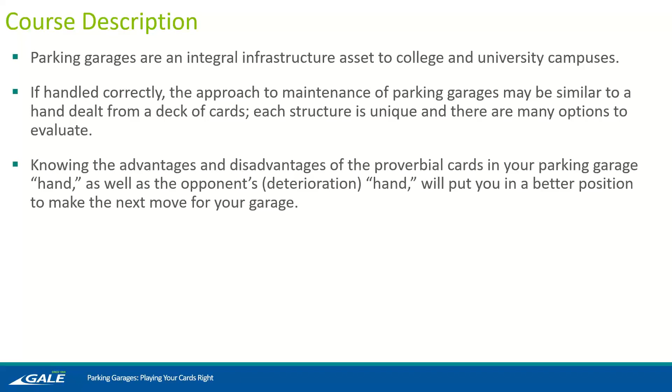So what cards do you hold in your hand? There are four major structural systems that I'd like to talk about today. There are additional different types of parking structural systems, but most garages fall into these four categories. The first one we'll talk about is a total precast concrete system. And when I say total precast concrete, I mean the superstructure, because you're looking at a cast-in-place foundation for pretty much all of your structures.

The second type would be a cast-in-place concrete system, which is all cast in place and nothing cast off site and brought to the site. The third type would be structural steel and precast concrete, which is a hybrid system. The fourth type of structural system is a structural steel frame with metal decking and concrete poured on top of the metal decking.

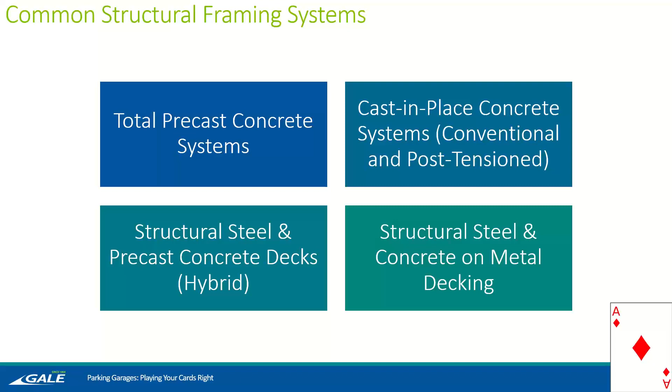Oh, sorry, this is lagging a little bit.

For the total precast concrete system, you have a cast-in-place concrete foundation that takes some time to excavate and pour. Then the superstructure is actually all fabricated off-site and shipped to the site in pieces. The photo on the left shows the crane in place, erecting one piece of precast.

When that piece is placed, there are some welds or bolting done in place, and then they move on to the next piece. The photo on the right shows the facade of a precast concrete garage, and you can see the jointing of how it all comes together like a set of Legos.

The thing about pre-stressed precast concrete is that most of the long span members are pre-stressed. In the photo on the left, the members that span from left to right are 60 feet long. They put the pre-stressing strands in these forms, which have fixed end pieces, and they pull them at each end and tension the strand before pouring all the concrete in the form.

They allow the concrete to come up to about 75% of total strength, which they can achieve in about one day in the plant. Then they release the strands, which puts a tensioning force at the ends, helping with the flexural strength of those members.

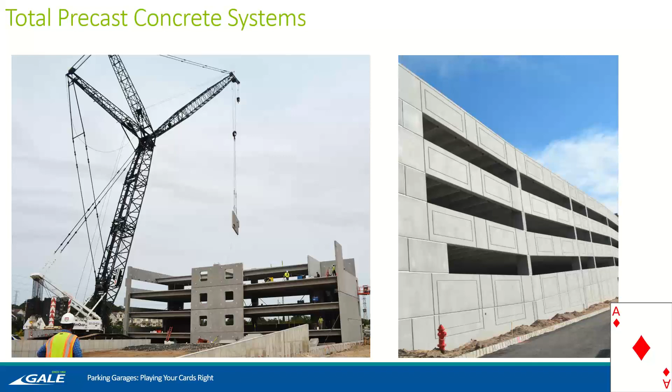So I'm going to talk about some pros and cons of this construction method. The pros: because they are prefabricated elements, they have a certain level of quality control they can maintain. Typically precast concrete plants have very high roof structures with overhead cranes, so they can pour these without rain or other weather effects during fabrication.

There's also an organization called the Precast/Prestressed Concrete Institute that certifies these plants and does inspections to make sure they're keeping proper records, that their concrete is coming up to strength as stated, and that they're doing all the quality control procedures they need to do.

As a result, you end up with a superstructure that is more durable than, say, a cast-in-place concrete structure in some respects. We inherently have cover on the embedded reinforcement in a concrete structure, which provides some protection for the structural part of the concrete.

As you could see from the photo I showed earlier, the construction schedule can be expedited for the superstructure because the crane will put up 20 pieces a day, sometimes even more, and it goes really quickly during construction.

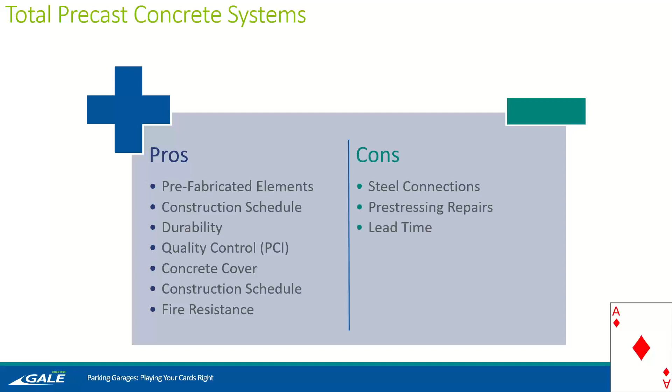The next structural system I wanted to talk about was the cast-in-place concrete system. Just like the foundations are formed and poured in place, a cast-in-place concrete system is formed and poured in place, and often requires some level of temporary shoring while the concrete comes up to strength before forms are removed. The quality control in the field can vary depending on how much construction oversight there is during construction of the garage.

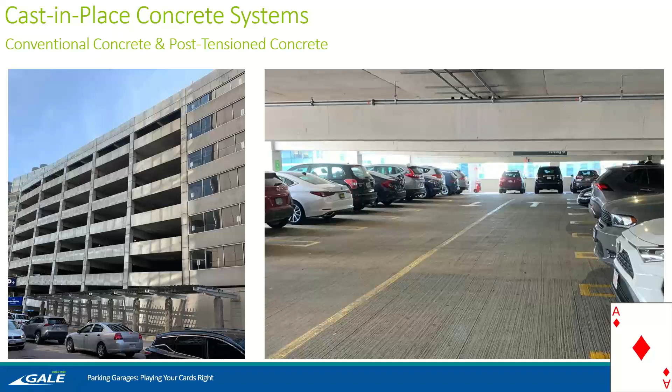I'll flip to this next slide where I have the pros and cons. An advantage to this system is that there are fewer joints. Unlike the precast concrete system I just discussed, the cast-in-place concrete system has continuous joints, and oftentimes the reinforcement runs continuously through, like a beam to column connection or a slab.

Everything is tied together continuously, which can result in less deterioration of the joints depending on the level of maintenance. Just something to be aware of: with a cast-in-place concrete system that's how it works, but with a precast concrete system you have a lot of joints that you might need to maintain or repair over time.

Cast-in-place concrete systems are often used if you need flexibility in the framing, such as an odd footprint for the structure, or if you need options for ramping or different types of bays and chamfered sides of the garage. Those are advantages to considering a cast-in-place concrete system.

The long span condition achieved with pre-stressing can also be achieved with a cast-in-place concrete system by using post-tensioning. It's a similar concept, but the tensioning happens after the garage is poured. The strands are draped inside the forms, the concrete is poured, and once it reaches adequate strength, the tensioning cables are pulled tight. That's why it's called post-tensioning for cast-in-place garages, and pre-stressing for precast garages, where the stressing happens before the concrete is poured.

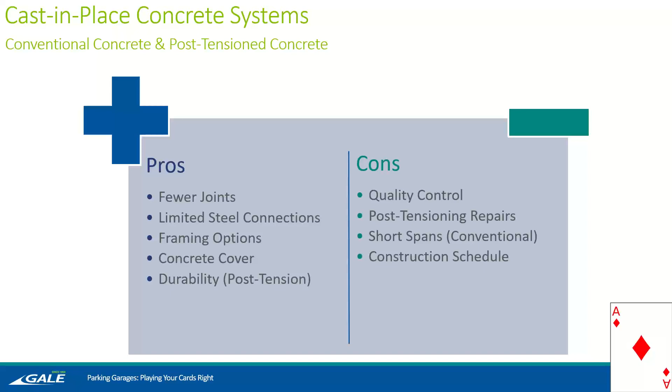The advantages are that the precast concrete deck has quality control from the plant, and you have concrete cover on the members. You can also see deterioration of the steel if you're doing regular evaluations, catching problems ahead of time, whereas with concrete it sometimes remains hidden during a visual evaluation.

Steel connections can be susceptible to deterioration over time, and again, pre-stressing repairs can be costly if it gets to that point. The durability of the steel frame can be a concern if maintenance isn't kept up with, and the lack of concrete cover on the steel can make it more susceptible to deterioration if the paint coating deteriorates over time. Sometimes steel frame garages also have a fireproofing requirement.

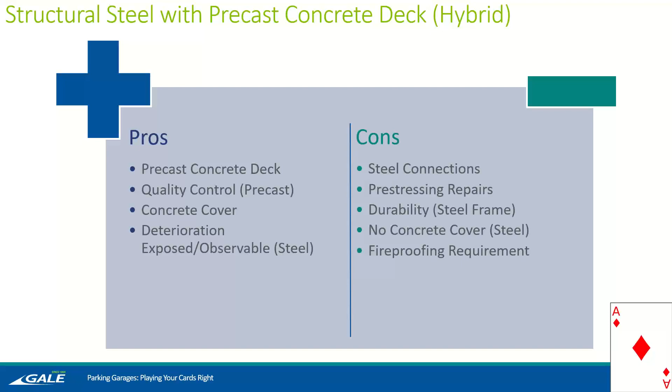The last structural system I wanted to talk about is structural steel with a metal deck and concrete slab. The way this system works is a structural steel frame is erected, the metal deck is supported right on top of the steel beams, and then a concrete slab is poured on top of the metal deck.

A lot of times these systems are a little more susceptible to deterioration, but can still be maintained and have long service lives. So you just need to be aware of the cards in your hand and what you need to do to extend the service life of your structure.

These structures tend to have lower initial cost and can be quick to erect and install. There's more flexibility with the framing options with this one, because with structural steel you can do virtually anything you want with it.

Deterioration is exposed and observable if you're looking for it. The disadvantages can be quality control, as we've talked about before. The durability of the metal deck is very susceptible to deterioration. We'll talk about next how moisture gets into the concrete and really doesn't have much of a place to go when it hits the metal deck, so it often sits on the metal deck and causes more deterioration that way. And there's really no concrete cover on the steel, so some of it may need to be fireproofed.

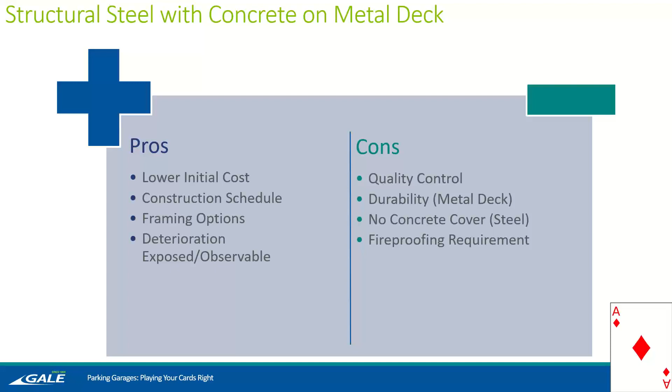So that was a long first section, but understanding really what you have on your hands is really important when you think about how to take care of this asset, what you need to do to repair it, and to really understand what's happening.

So the opponents are the deterioration culprits. There are four of these I'd like to briefly go over: harsh weather exposure, de-icer chemicals, failed drainage systems, and failed waterproofing systems.

Before I dive into that, I'll go over a brief description of the majority of concrete defects, which have to do with the ingress of water, and depending on your geographical location, the use of de-icing salts, chlorides penetrating the concrete, because concrete is a porous material. Even though it looks solid, it has air in it and pores that water can get into, eventually reaching the reinforcing steel.

When water reaches the reinforcing steel, there is a protective coating on the steel inherently, but eventually that erodes and the steel starts to rust. As the rust builds up, it exfoliates and causes an expansion of the reinforcing steel area. The concrete material itself is very strong in compression but very weak in tension.

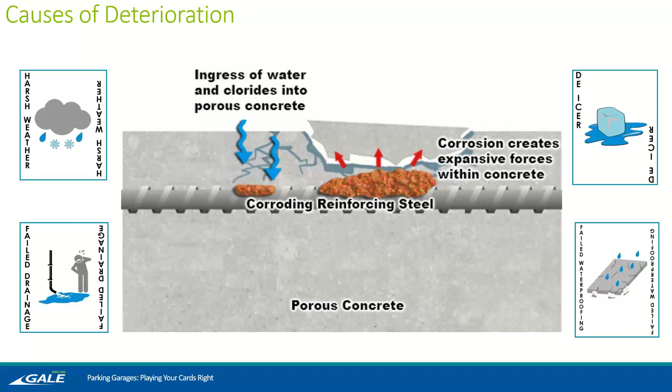With harsh weather exposure, we see a lot of this in climates with quite a bit of snow, and clients don't always have the ability to dump the snow off the side, or have a snow gate to push the snow off, or even a snow melter situation where you'd be able to melt the snow on site.

Sometimes, and this is in a city setting, these photos are of a parking garage where the owner needed to clear the snow so people could park, but didn't really have anywhere to put it. So they put the snow in the corner, and by the end of winter it's gone, and they kind of move on. But in this pile of snow is also de-icing salts and whatever they used to treat the decks ahead of time.

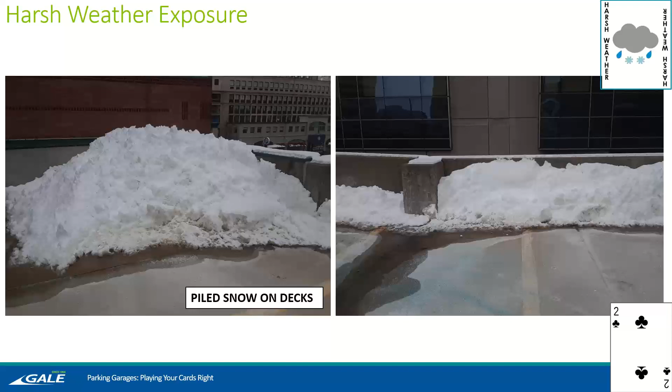Or even during the last snowstorm, they clear the snow and then salt it, or whatever they do, and then it all piles up and eventually melts. When that snow melts with the chemicals inside of it, the chemicals get into the concrete through cracks, through the pores, before it gets to the drainage. Some of it reaches the drainage system, and the part that doesn't sometimes gets into the decks.

That leads us into talking about de-icer chemicals. It's a catch-22, because as a university or a school, you need to keep your pedestrians safe and make sure cars aren't crashing into the sides of the parking garage. But at the same time, the garages are made of concrete, and salt isn't great for the concrete. So it's kind of caught in the middle of two things pulling you in two different ways, right?

So how do we deal with that? We'll talk about what de-icing chemicals do to the concrete, and we can talk about ways we can still use some chemicals to melt the snow, but maybe find ways to counteract that in another way.

We'll talk about that a little bit later. But these are just photos of the de-icing salts that you can see, and some water that's kind of suspended on the deck that hasn't quite made it to the drain yet.

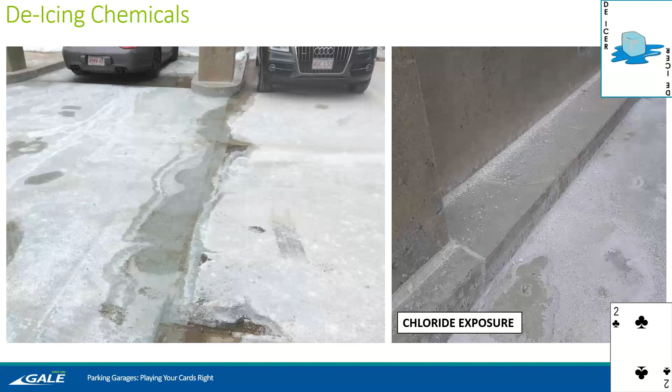We talked about how the chlorides, once they get to the steel, along with the moisture, actually accelerate the deterioration. If you just have water getting into your concrete, it can still cause deterioration of the steel and the exfoliation and spalling, but the chlorides tend to accelerate that chemical reaction.

So these are another slide looking at the underside of the concrete decks. On the left, you see a concrete on metal deck slab with structural steel framing supporting the slab. This is an extreme case where this has been ongoing for a long time, where the moisture and the de-icing salts have gotten so bad into the metal deck. The metal deck is starting to deteriorate and allowing that to get into the structural steel. This was once covered in fireproofing, and the fireproofing has even come off of the steel in this situation.

On the right, this is a precast concrete garage that didn't have maintenance on the joint sealants. The joint sealants I was talking about earlier protect the connections between the precast concrete members, but they also protect the structural load carrying members below. On the right, you can see the precast concrete has deteriorated. There's a pre-stressing strand along the bottom of this picture, and there are stirrups from the beam that are also rusted and need to be repaired. That's just because the joint sealants above had failed, and the water with the chlorides was getting through the joints and down into the concrete and then into the load carrying members.

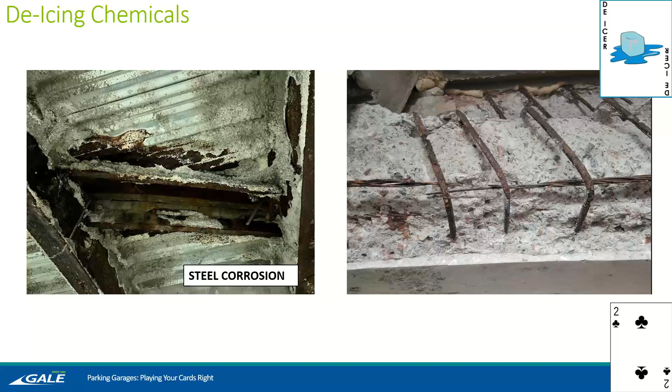All right, the next one is a failed drainage system. Failed drainage systems can fail in different ways. They can crack and cause leaks, or they can just be clogged and need to be cleared.

I included this photo on the left because this is a cast in place concrete pier with a precast concrete column above it. What happened in this situation was the drainage wasn't working above, so the water was backing up and finding its way through the joint sealants and down the side of the column, and then it reached this foundation where the quality control was a little bit different. There was a ledge to catch the water, and over time it really ended up deteriorating.

The photo in the middle shows after we demolished the concrete that was not sound anymore, and that's what was left. In this case, because this had gone on for so long, the whole garage needed to be shored up. On the left, you can see some post shores, but there were shores for the main load carrying girders. On the right photo, you can see one of the shores holding up the girder. That's another location in the same garage. All the way up to the roof, we had to shore this so that the repair to the foundation could happen without risk of anything happening while we're making that repair.

So the failed drainage systems can be a real problem, especially when they're clogged and then the water needs to find a new place to go.

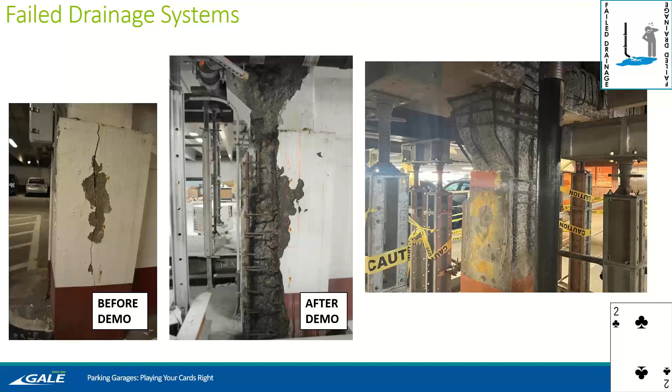These are just other photos from the top side. On the left, we have water that can't get to the drain. In the middle, we have a clogged drain, the water building up, and when it sits on these joints, it will find its way through and eat at whatever's there. On the right, we have another photo similar to the first one, but a different garage, where the water was coming right down the side of the column.

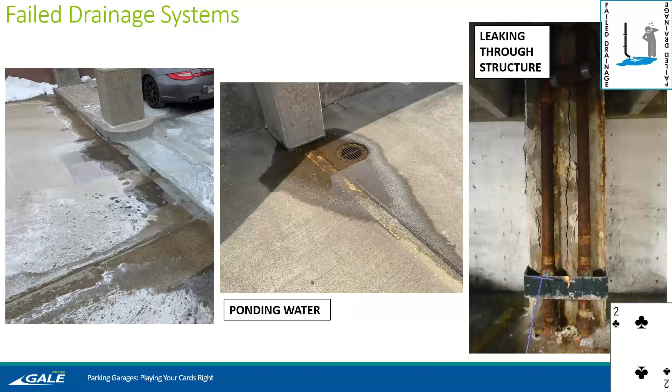And when it hit the cast in place concrete foundation, that's where it really did a number. When we sounded this out, hammering around the side of this is a way to identify unsound concrete. The entire concrete cover of 2 inches was completely gone and ready to come off. So for the repair of this structure, we also had to shore this up to the roof to make sure the whole foundation pier doesn't fail during the repair.

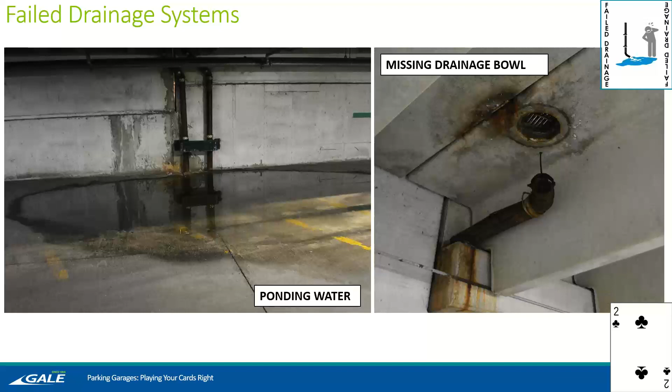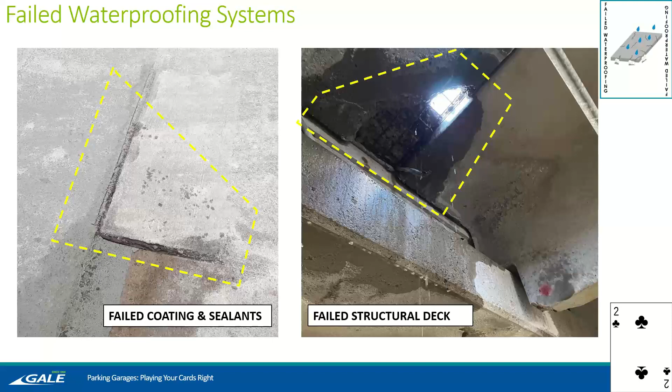It's just actively leaking. When the waterproofing system does fail, this is the kind of deterioration that you end up seeing. This is a close-up on the left of a joint sealant on a precast concrete system. This is a joint between 2 double T beams, very close up, showing you where the joint sealant has failed and allowing moisture to get into the joints.

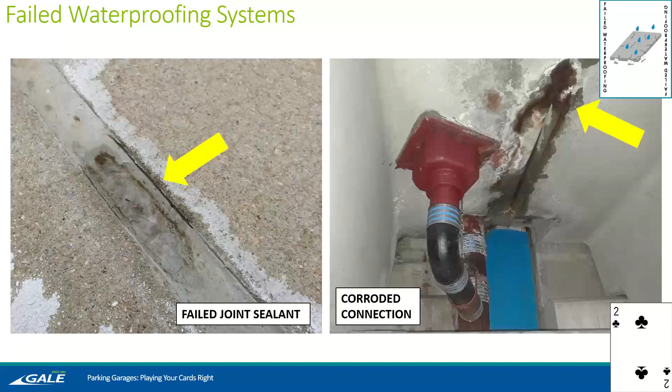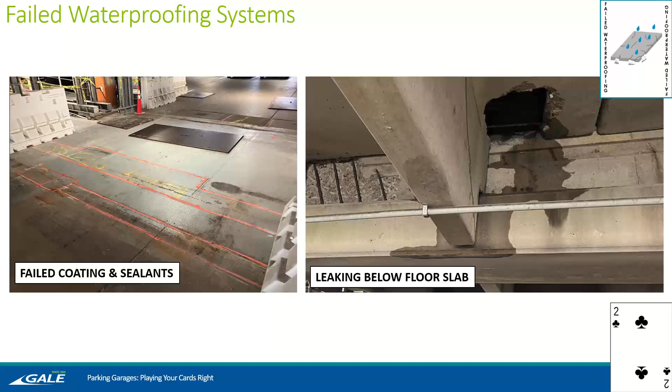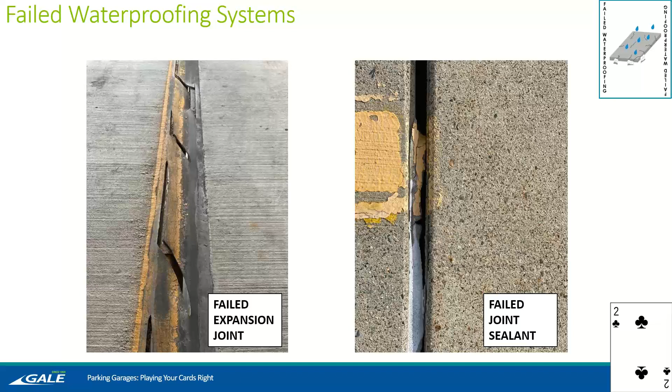On the left, we have a failed expansion joint that has completely surpassed its useful service life and needs to be replaced, which is allowing, again, moisture to get through. And same thing with the failed joint sealant on the right - that joint is completely gone and needs to be replaced.

So let's go into the third section to talk about the game. So now you know what cards you have, what cards your opponents might have, and now you need to figure out, well, how do I approach this game of repair? Because I know my garage needs repair. I can see this, I can see that. What's going on?

So the step-by-step process that we typically take is to address the immediate safety concerns. These are typically areas of concrete that have spalled, but haven't completely broken apart from the structure and might actually fall from overhead - those would be immediate safety concerns. And then the next thing is the structural deterioration that needs to be addressed. It's not a safety concern yet, but will be in the future.

Then we go to minor defects. The thing with the minor defects is you do want to repair them because they eventually end up migrating into the structural deterioration category. So if you can repair the minor defects ahead of time, then they are a little less costly than the structural deterioration ones. And then cosmetic repairs would be the last one.

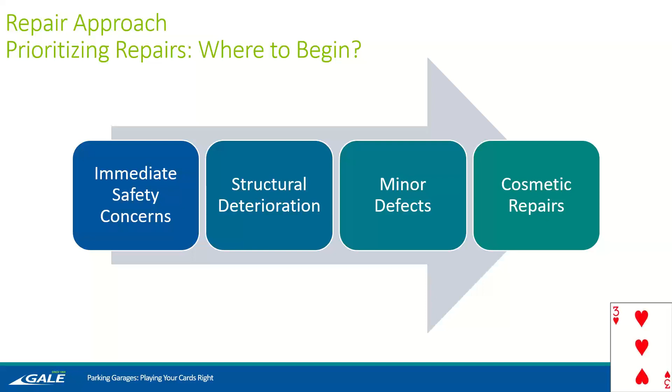Now, I know that most people would like to see the cosmetic repairs happen first because you want a garage that looks nice and feels good to be in. But from a repair standpoint, we want to try to take care of the other items first.

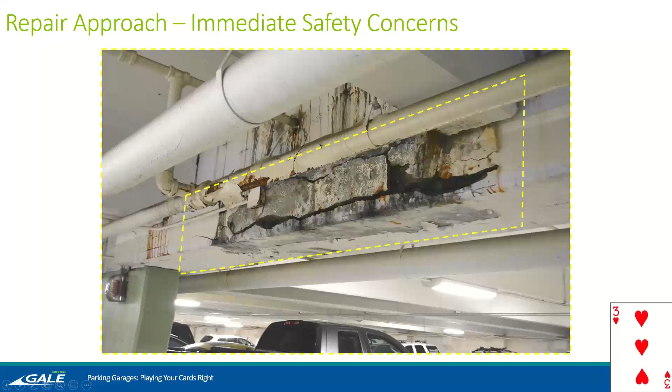And this is just another slide showing some examples of safety concerns. Again, it might look like cracks, but what we're seeing here, you can sound it with the hammer, we can do different kinds of sounding techniques to identify what is still bonded to the concrete and what's not. That's a safety concern where you want to have it removed so you don't have it unexpectedly fall on a person, a car, just in general. When concrete falls, people don't feel as safe.

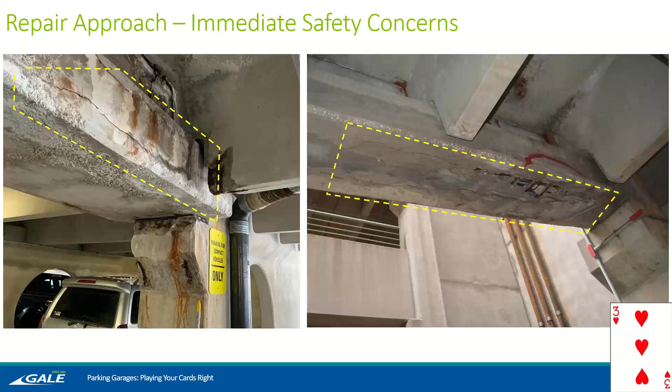And on the right, same thing. You can see some of the reinforcement there. You can see some cracking, but really that's all hollow underneath there and needs to come down. This is another example of looks like cracking on the left, all hollow. When they came and knocked the concrete out, that's what it looked like on the right.

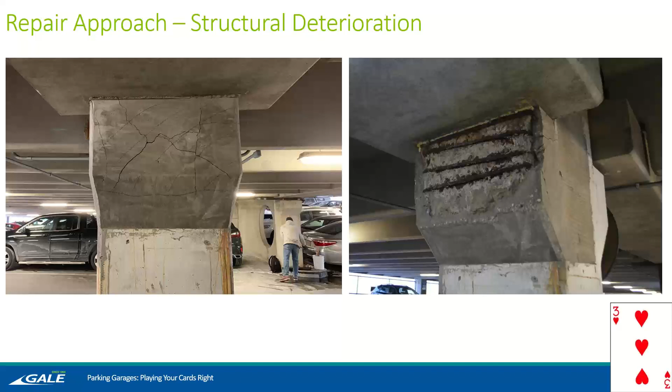So the next approach would be to talk about structural deterioration. So these are the items that could need to be shored in order to repair them. Or if we don't repair them now, we're going to be looking at shoring the garage at some point in the future.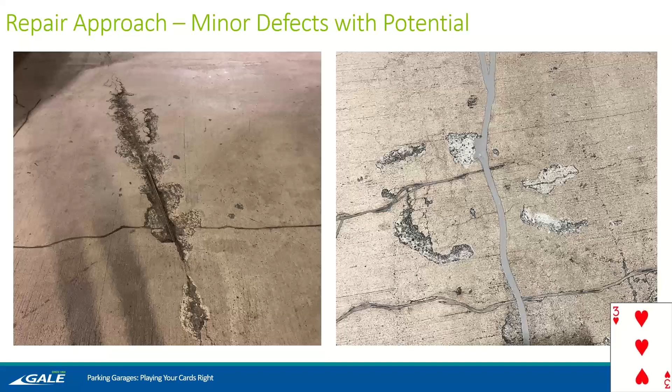You want to take care of these minor defects before they end up being major defects. On the right, you see there was a crack that was repaired with that gray color—that's a routed crack, sealed with sealant. Then there's some spalling and cracking that needs to be repaired there, again just avenues for the chlorides and moisture to continue accessing the concrete pores, which eventually get down to the reinforcement and cause corrosion.

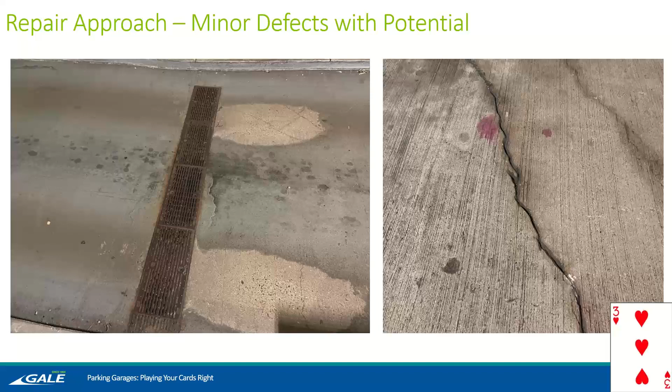So this fourth section is the strategy. We've talked about the cards that we have in our hands, we've talked about the deterioration mechanisms, we've talked about the game of how to approach the repairs, and now we'll talk about the strategy behind how to maintain the garage.

With maintenance, for structural maintenance, you want to think about all of the elements that we need to worry about on our garage. We have the floor slabs, which see all the vehicular traffic, and especially our roof decks, where we have all the rain and potentially snow exposure to moisture. We want to take care of those roof slabs.

So you're going to be looking at cracks, spalls, joint sealants, maybe some traffic coatings that you've added to your garage, or maybe they were there from the initial construction, that you want to really make sure you maintain.

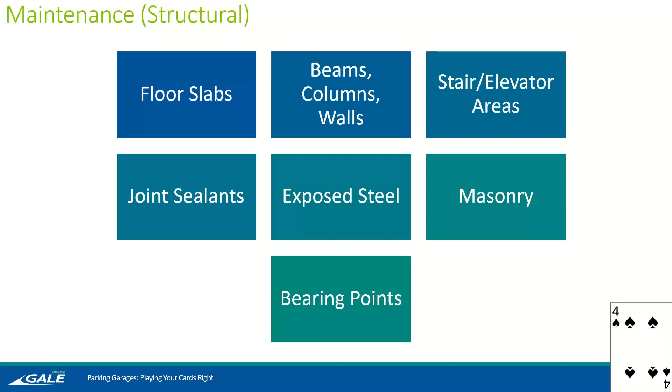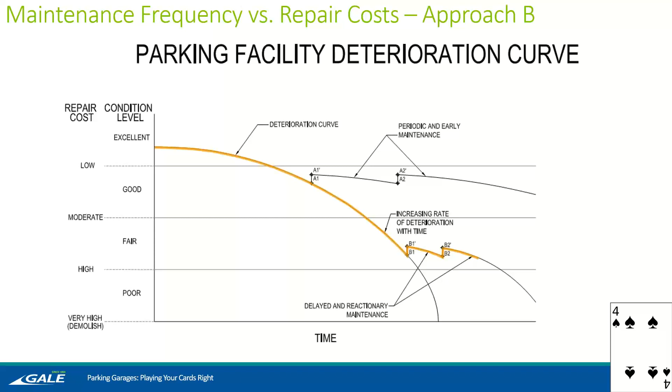So what you'll end up doing is you'll invest, and then much quicker you'll have to invest that same amount, just to maintain that fair condition. You'll be performing your repair projects more often, just to try to avoid having to demolish your garage and rebuild.

So just to close out on this, I wanted to show some photos of the delayed and reactionary maintenance section of that curve, with the temporary shoring projects that we've had recently.

This project was actually very challenging. We had 5 levels on this garage. But the lowest level...

So this garage, just to backtrack a little bit, needed to be kept open full time. It was a 24-hour garage. On the upper levels, I'll show you a picture in a minute—we had shoring beams that actually spanned across the drive aisles and had shoring towers on the left and right of the drive aisle so that cars could still pass through while the repairs were being made.

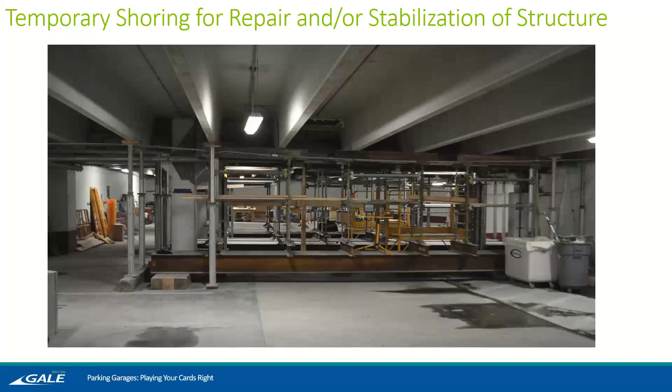This is that same area. This is another photo of one I showed you earlier, which was one of the safety concerns, where we had them knock down the loose concrete. This is part of the structural repair phase where we had to shore up part of it.

The disadvantage here was that this shoring arrangement meant they had to take part of the garage out of service, not loading it above because of structural concerns with this beam. We're repairing this garage now and it will be back in service shortly. This just shows you some of the things that happen - if you're able to invest in maintenance early on, you won't end up needing to shore like this.

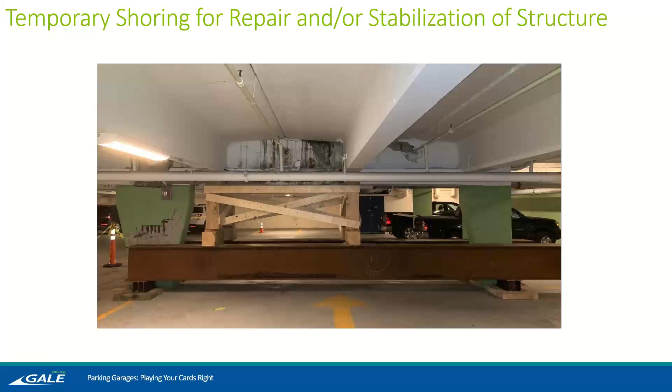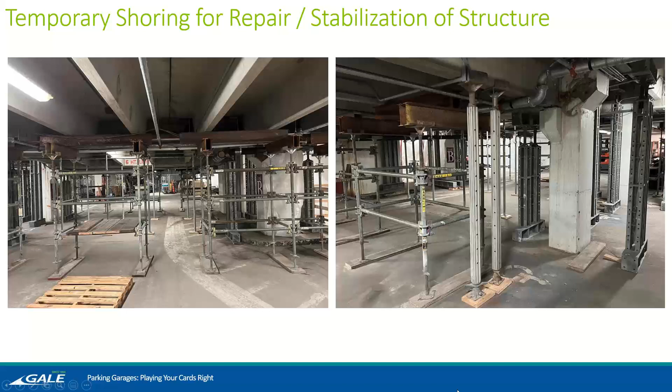This is the original shoring photo. I showed you that on the other side of the garage we're doing another phase, and it shows how much shoring is in place - we're shoring the beams on either side of the inverted T-beam, and the inverted T-beams themselves are also shored on either side. There's a lot of shoring supporting the stems so we can make repairs and wait for the concrete repairs to achieve their strength, then release the shore and allow the structure to function as before.

This is that same garage. We have the shoring beams at the top of the drive aisle - you can see these metal shoring beams, actually 10-inch deep, I think 10 by 39 beams, that span over to the shoring towers. At every level, the shoring tower is picked up again on the level below, so we have a continuous load path all the way down to the basement.

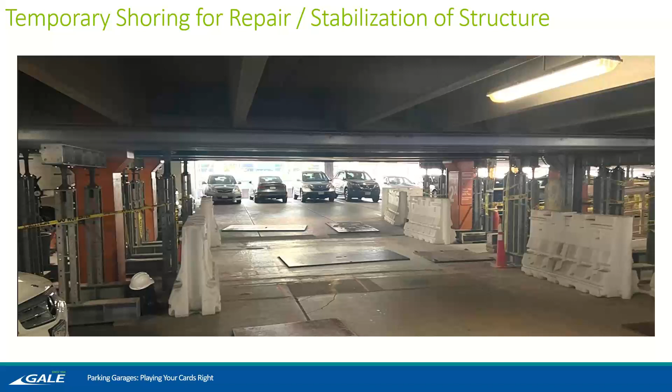But this allowed the owner to keep this parking garage open to the tenants. They continued their revenue stream and were able to accommodate all of their parking patrons for a longer time.